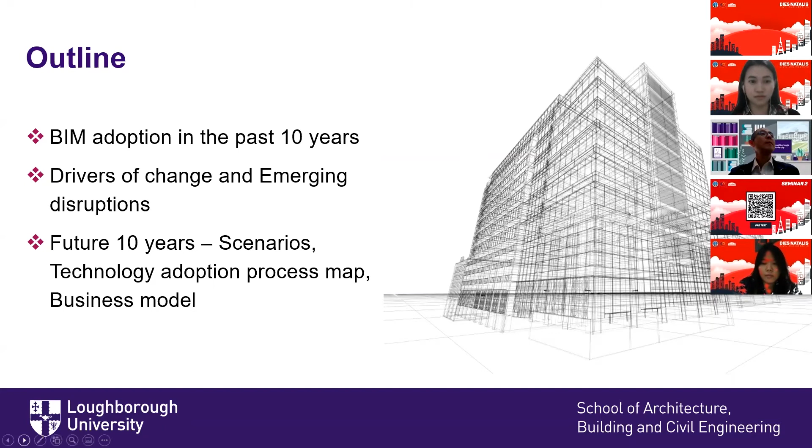There have been numerous published government and other institutional reports promoting the use of BIM in the planning, design, and construction process. The use of BIM was seen as the recipe for addressing poor performance, increasing efficiency and productivity. BIM brings together information in the same place through design, construction, and it will also be useful for future operation and maintenance of facilities.

To support the practice and measure development, this is a model of BIM maturity to demonstrate the maturity level. As the maturity level increases, information sharing increases. In 2011, the UK government mandated the use of Level 2 for all publicly funded projects by 2016. At the moment, there is very little consensus on what Level 3 actually means for practice.

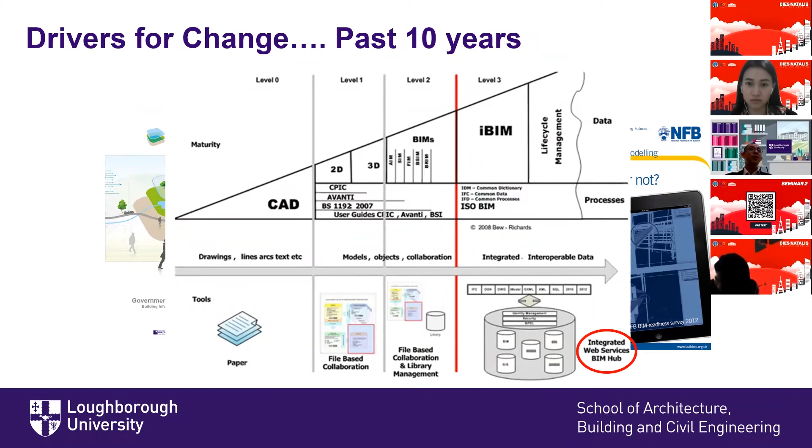We look at a traditional design process, which we call 'over-the-wall' design, where the design comes from the architects and then is thrown to the structural engineers, then quantity surveyors, then mechanical services engineers, and then to the contractor, with very little communication. BIM is actually trying to bring this together into a much more iterative process, much more coherent collaboration, rather than just throwing the design over the wall without any further sharing—optimizing the design process itself.

So without sharing, without collaboration, this over-the-wall design process will lead to rework, a lot of waste, and inefficiency in the process itself.

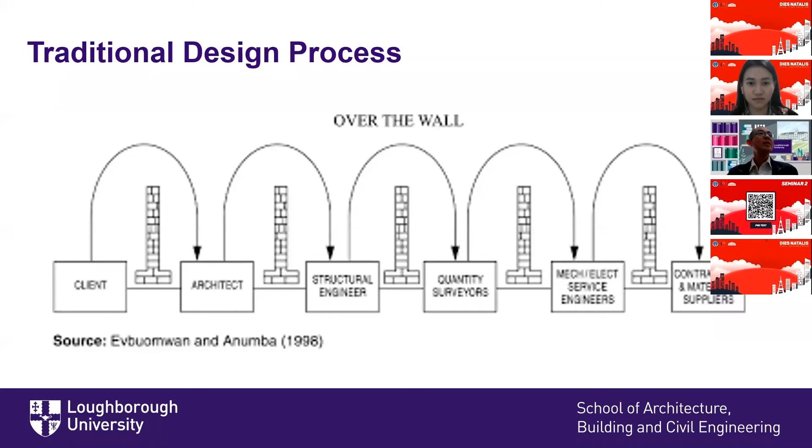To address this problem, designers need to collocate, come to the same table to exercise the act of designing. They interact with each other in a co-production of knowledge. The output is a design drawing or 3D BIM model. The quality of this technical output cannot be detached from socio-cultural input from the design team in the process itself.

Collocation brings the benefit of audio-visual feedback and consensus in real time, so each member can fully understand the situation and contribute in real time. In the event that collocation is not possible, the outcome can be compromised.

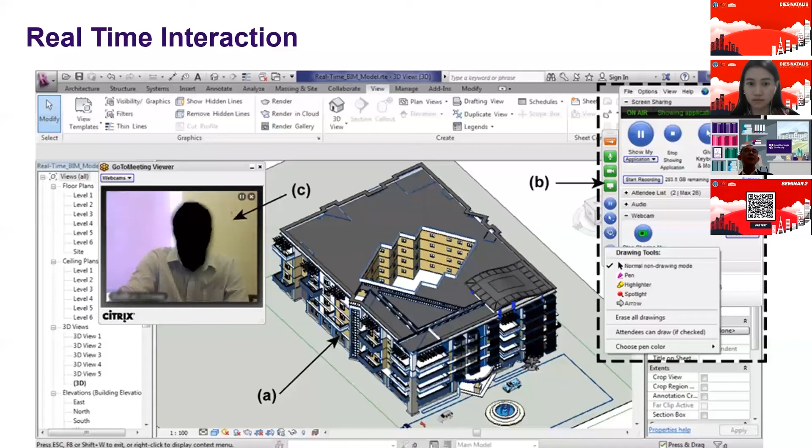The social and cultural input has to be taken into account, and the design process itself, which has been seen as linear in the past, should be iterative. In this case, the process of optimizing design carries on and goes on, and the input from each party in the process should be considered within the BIM environment.

This diagram shows a digital initiative in the UK. Since 2010, there has been a lot of initiative in terms of government strategies and white papers encouraging the use of BIM, as well as some funding from the government. So currently in the UK we have an initiative called Digital Twin initiative.

Within this, it corresponds to the Digital Twin initiative. We also have what we call the Information Management Framework. The Information Management Framework is developing a common language by which parties could share information, what kind of information they have to share. And the digital twin is really one of the recent advances in terms of BIM development.

So here's a simple representation of a digital twin. A digital twin is a realistic digital representation of assets, processes, and systems. Every single object in the physical world should be represented in the digital twin. The beauty of it is there is some sort of interconnection between the digital twin and the physical twin.

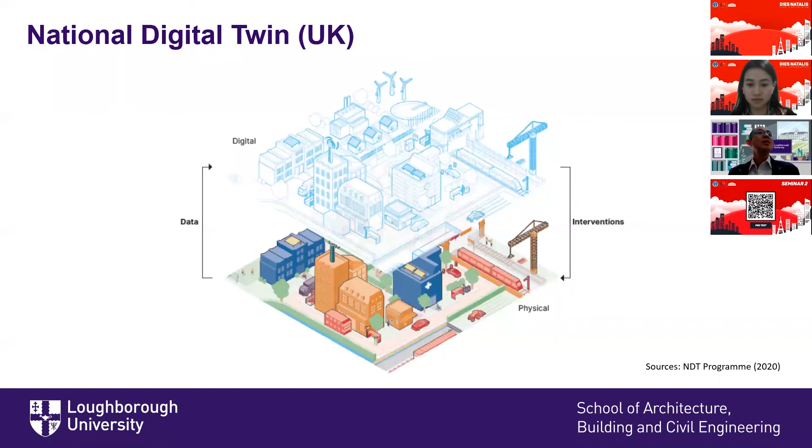So as I promised before, I'll now focus on BIM adoption. This is a survey which has been collected for the last 10 years by the National Building Specification, a major institution run by the Royal Institute of British Architects.

Over the 10 years, 400 to 1,000 respondents participate in the survey, mainly from the UK. Professional institutions participate, mainly architects, civil engineers, construction managers.

You can see from 2011, there was only 13% aware of and using BIM. Then in 2020, we have 73%. So a 60% increase of professionals using BIM. Bearing in mind that...

Despite this significant increase of BIM utilization, in the survey, people who tend to use BIM actually tend to respond to the survey. Those who don't really bother to use BIM, perhaps it's not very interesting for them to participate.

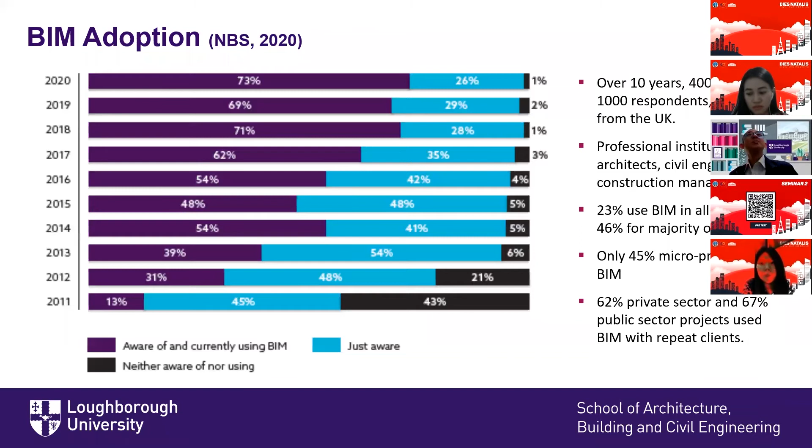From another very recent survey, 92% of design teams are using email rather than the system they are supposed to use for collaboration and sharing information. Also 80% of respondents struggle with version control. This really reflects some of the issues with information sharing in the design process associated with BIM.

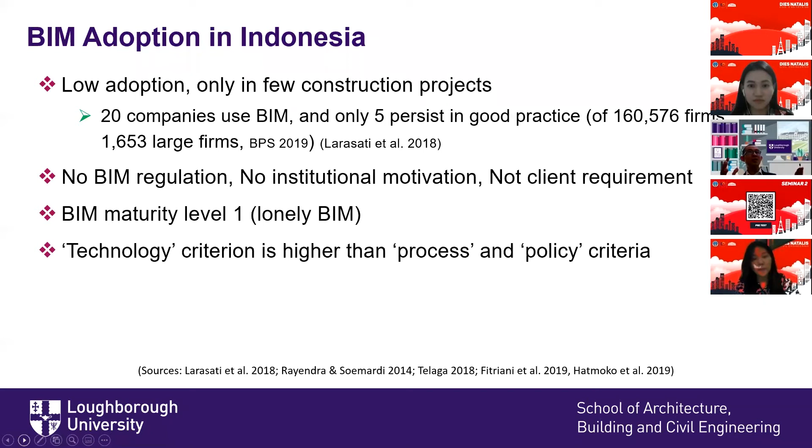So it's focused on technology rather than process and policy criteria. There's also a lack of understanding and awareness of collaboration benefits - a 3D BIM model used as a tool rather than for communications between stakeholders. So communication is still really disjointed, not really connected very well.

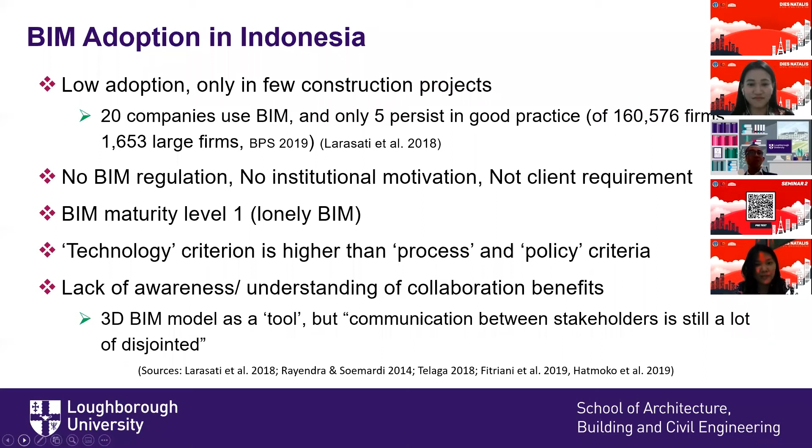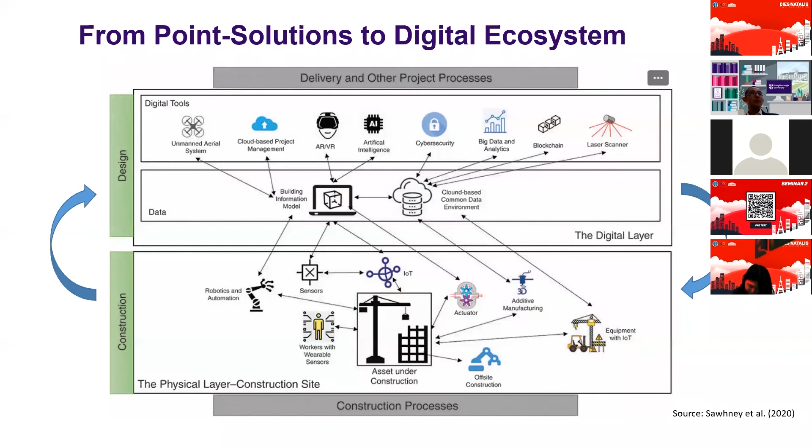In the UK, over the past 5 years, we have what we call the transforming construction agenda - how we can implement or move the industry forward given the opportunity presented by technology itself, using that capability to actually improve construction performance: reducing costs, increasing speed of delivery, lowering emissions, and other competitive key performance indicators.

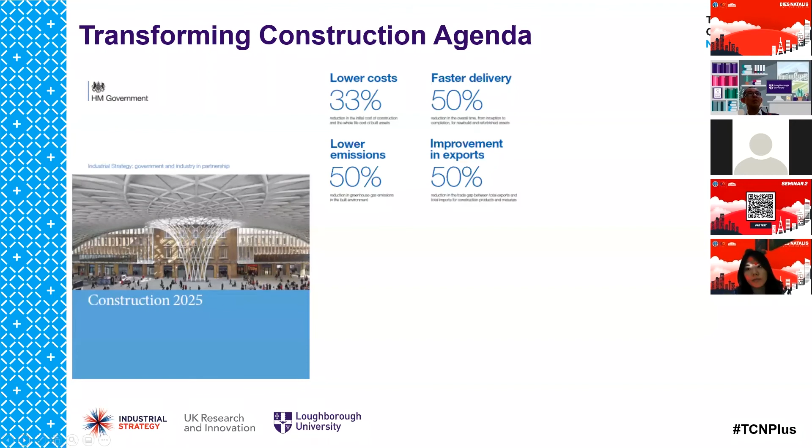This was initiated by a government report entitled Construction 2025, and then about 3 years ago we had an industrial strategy suggesting the use of digital techniques, offsite manufacturing, and whole life asset performance to achieve performance targets - lower cost, faster speed, lower emission, and so forth.

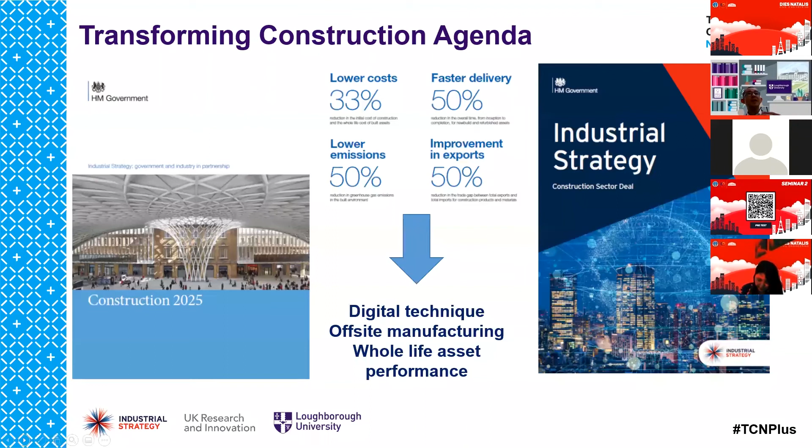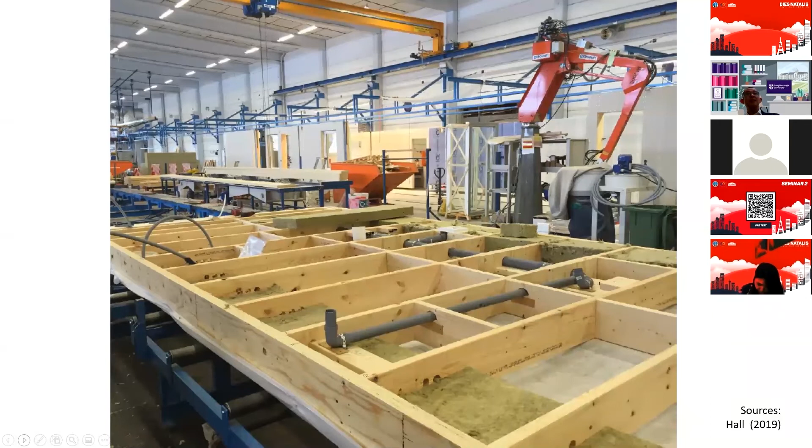So what does this mean really? We build a component in the factory - moving to offsite manufacturing, producing components in the factory that integrate plumbing, electrical and mechanical work within the component, rather than building on site and then trying to assemble panels in the factory again before bringing them to the site. I would suggest this is not new - we have seen all this before.

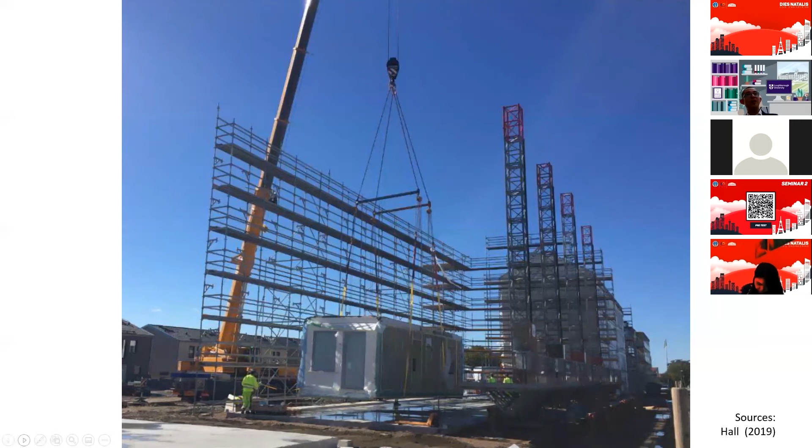In the past 25 years, we have seen the prefabricated manufacturing concept. However, there is something different here, because what we're trying to do is embed the capability presented by Industry 4.0 into the offsite manufacturing and on-site assembly process.

So there are a few developments, not new, but the take-up is pretty little. Just a few percentage of the construction sector use the approach. It's not new, but the take-up is slow.

There are major initiatives such as BoKlok here by major Swedish contractor Skanska, collaborating with IKEA, the flat pack furniture producers. So they produce a house based on standardized components produced in the factory. They have a number of markets in Western Europe: Sweden, Norway, Finland, and the UK.

Another example is Katerra in the US. They use a concept called building platform, which encompasses a catalog of components which are standardized, but could fit into different buildings. This permits combining standardization and customization of the product.

Customization is to meet different user requirements. The platform—I would like to stress on the platform here, building platform. The platform is a set of components that interact in very well-defined ways to allow a range of products and services to be produced. So the term platform itself is often used in software and manufacturing industry, where systems based around platforms have both supported rapid innovation and form a basis for growth and value.

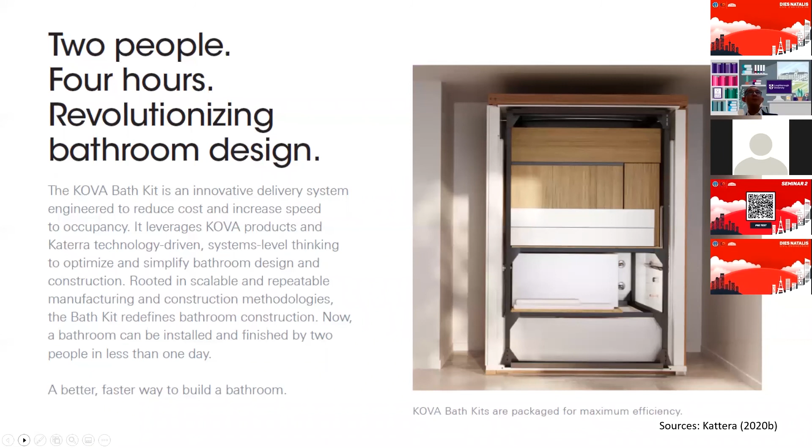So this is an example of what Katerra has produced here. It's a bath kit. It only needs 2 hours, well, 2 people, and would require 4 hours to install. So that's what you can see, what the final product is on the right-hand side here.

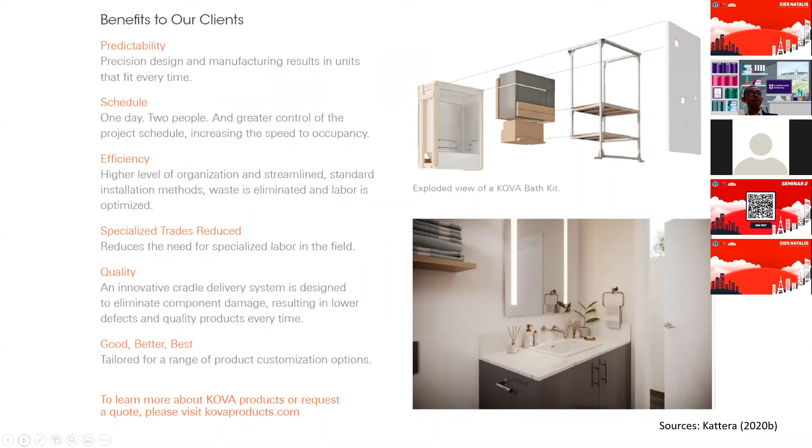Another example in the US is what we call Project Frog. Project Frog is a very clever idea in terms of vertical integration, integrating the players to produce manufactured components. They have a standard kit of parts platform, and they also have a technology platform in terms of the design software, in terms of integration software that can really work between parties. So they have sort of solved the interoperability problem, and they also have standardized process implementation, and they train the workers so they know they are working on the same design process.

And this is an example of integration of the process itself.

So we come to a business sense here. We talk about the technology, so let's talk about whether we can make business sense of what we have seen here. So another study by McKinsey is very interesting because it actually mapped out the value across the value chains—that is, from development, design, manufacturing of the components, suppliers of material, and then offsite production, construction, and so forth.

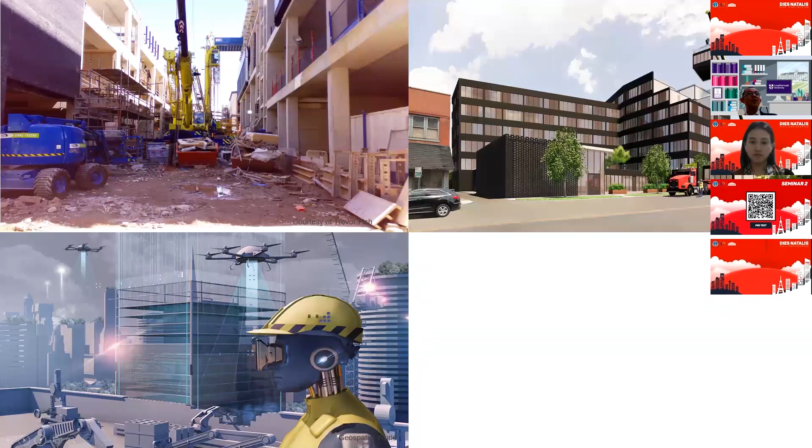So at the start of my presentation, I said that the industry is really difficult to change, and this represents a kind of typical construction site condition, which has a lot of implications on productivity and so forth, and how we can transform the future. So how can we transform this typical site to something similar to what you've seen on the right-hand side here, and also how we can use technology appropriately to help us achieve better outputs, and also how can we improve the skill.

In the past year, my team and I conducted a research project called DCON, Digital Enabler for Construction Transformation. DCON looks at common problems in construction that could be addressed by appropriate enabling digital technology, and at defining the future delivery process for the construction industry.